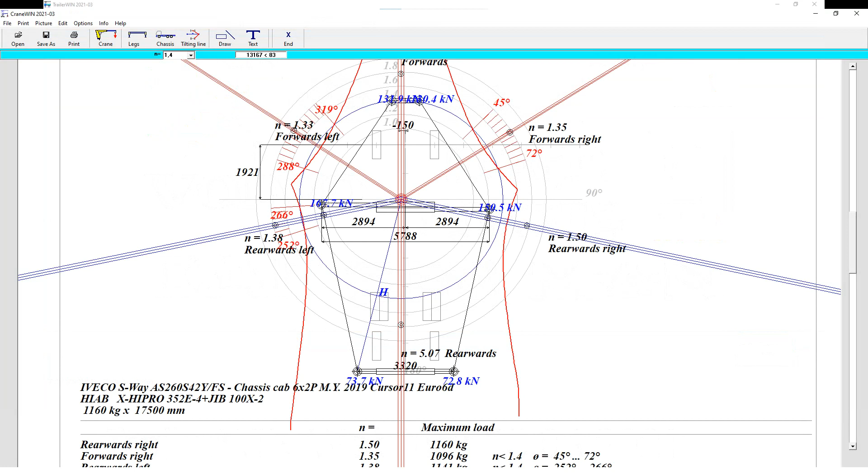TrailerWIN program is not only designed for trailer and truck calculation, it also has a lot of programs that are connected. For example, CraneWIN for crane stability calculation. We have FrameWIN for subframe calculation, and CornerWIN for advanced turning simulations, where we can see both static and a lot of different simulation options. For example, 180 degrees, 12.5 meter turning.

So I will start with selecting what type I want to calculate. I will put this highlighter on so you can better see what I'm doing. So we can calculate trucks and different types of trailer, and we can also make combinations of all these.

We start to select the truck, and there you can see a long list of models, and they are grouped in different years depending on when they have been put on the market. And as you can see, we have here a very long list, so it's almost all that is produced in the market.

I will start with, for example, now a new MAN, and we select here different models that are in production in 2021, and you can see that the MAN models are also for other truck markets. We have also for Euro 2 and for China 6 and those models.

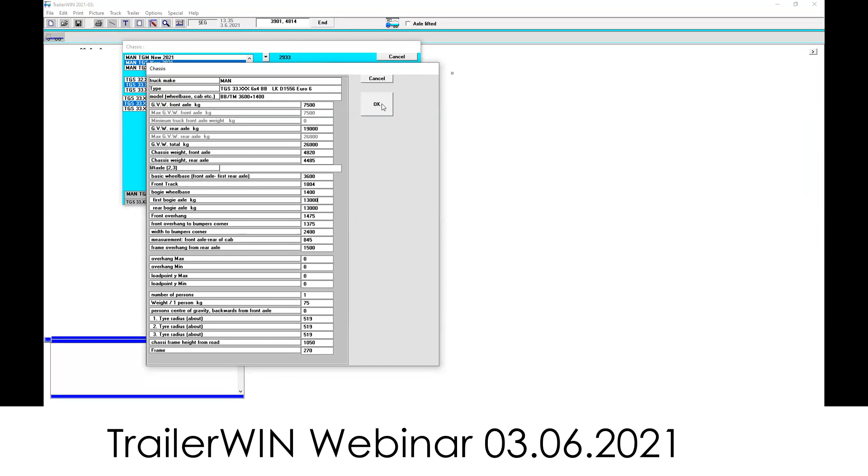Everything of this can be modified. So if you have some special model, you can also edit the measures and build up a model that meets your requirement.

Now when we have selected the model and the wheelbase, then we have the drawing of the chassis. We have a detailed cab drawing. We have a measure for front overhang. We have also weights unloaded. We have also max allowed weight for this model. So everything comes from the database.

Now we can start to add some body on this, and I start to click on the body button, and we find here fifth wheel. We have different types of body, box body, open body, side door, and so on. We have also a list of standard bodies that are made from drawings, and they can have all information like weight and center of gravity and also the load point.

But we select here standard box body, next window, we get the data for that one. And we have a body length that the program has already calculated for us. TrailerWIN calculates the body length to get maximum load on rear axle, so we can use as much load as possible when it's evenly loaded.

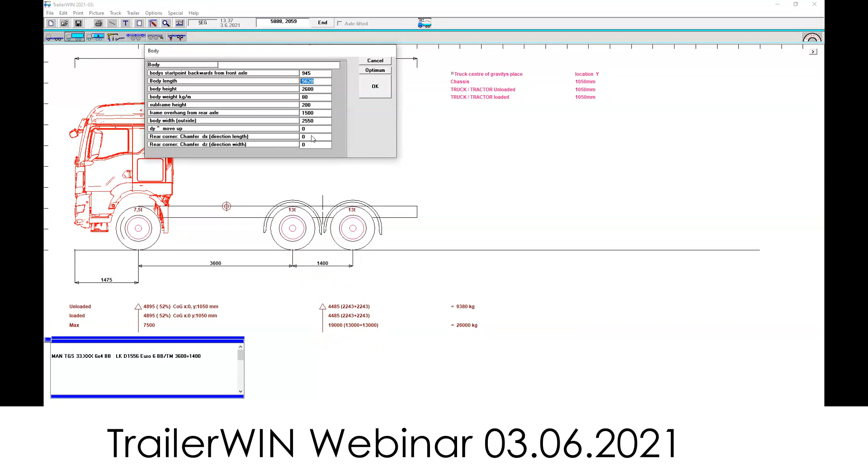We go to next window, and then we get a question about drawbar. We want to have a trailer behind, and we have different standard positions of the drawbar, but we can also here give a value where we want it to be. We have also the possibility to put underrun protection and also position how deep it will be.

So now when we have finished, we have a truck, we have a body on it, and we have already calculated what will be the maximum load that we can take on this chassis. We can see here the empty weight with the body on, and we can also see what the loaded situation will look like, how much we have on the front wheel and how much we have on the rear bogie, and what is the maximum allowed.

We can continue to add more equipment to the truck. We can add, for example, a cooling unit. So we go to the Devices menu, and here we have a lot of different equipment, and we select the cooling unit. We have many different manufacturers here. We have also a lot of different models.

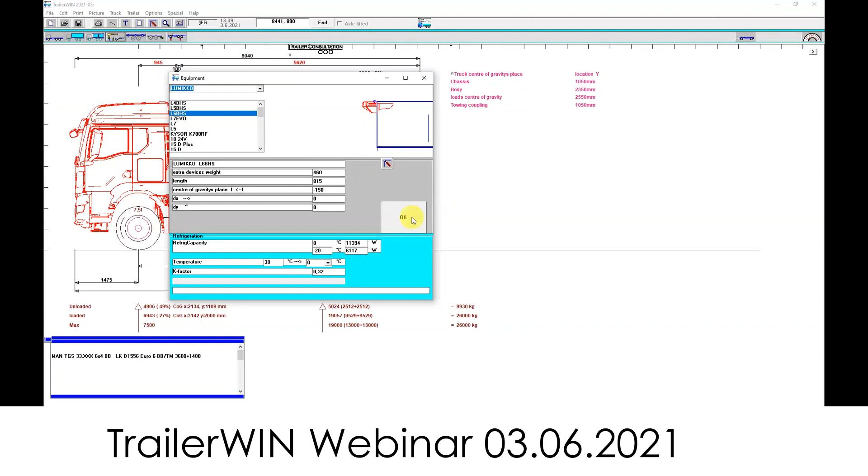So now we have a cooling unit. We can see directly from the picture that this will not work. It will go into the cabin. So you can visually also directly see what is going to work and what is not. We can easily modify. We can drag the whole body rearwards by clicking on the mouse and dragging it rearwards. We can edit the height of the body by grabbing this handle and lifting.

We can also change the length of the body by double clicking on the red hotspot measure, and then give a new value, and then we have entered a new body length for it. And every time we do something, the program is calculating the weights automatically. So we can see here now directly that we have too much load on the rear.

So this makes it more safe to do changes and to try out things, because you can all the time see what is happening. You get a warning if the chassis will get too high, or if you have other problems with the truck that you need to focus on.

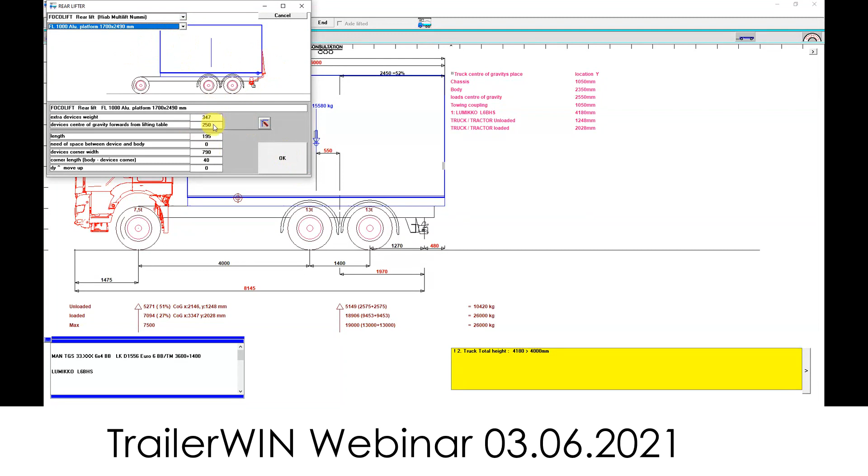We can put a tailgate lifter here also. Choose this type of body. I select the model. And as you can see, when I select the model, we have a detailed drawing. We have also all data for it. We have weight, center of gravity, length, and everything. So this is all in the program.

We can see also all the loads, or all the weights that we have on the chassis in this weight table. Here we can see first the chassis weight, front and rear. We have driver. We have body, how much the total weight.

We have the cooling unit. We have the rear tailgate lifter. We have towing coupling, and here it is very easy to see what is making the load on front and rear axle.

We can also now, when we have this, add a trailer. We have a trailer coupling already. Then we go to the trailer menu. And here we can see different types of drawbar trailer from 2 to 6 axles. And we have also different options with steering. For example, here we have last steered. We have second front steered, and so on.

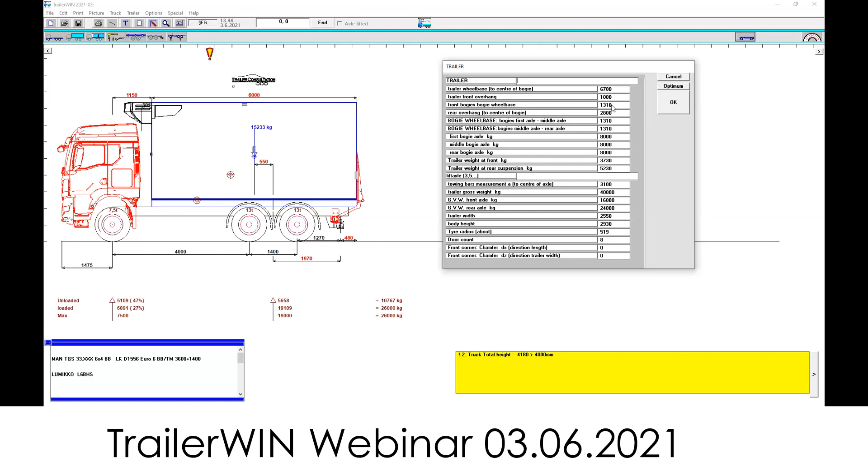We have here measures for the trailer. This we can modify according to our specifications and what we want to have. TrailerWIN has now made a standard trailer for this combination. We can see here also the weights and also the max allowed weight for the axle groups. For the trailer, we have also the possibility to add all kinds of equipment.

We have also a special devices menu where we have a lot of different useful equipment that is used on trucks and trailers. Here we have, for example, toolboxes. You can easily, with the mouse, just click and drag it to the position where we want to have it. And everything that we put on here has a predefined weight.

We have also, when we go to the load window, by default one single load that we put on a truck or a trailer, but we can also specify a special load if we want to have, for example, 26 ton, and calculate how it will look if we have the center of gravity in a certain position of the trailer. And then we can do a weight calculation for that exact transport.

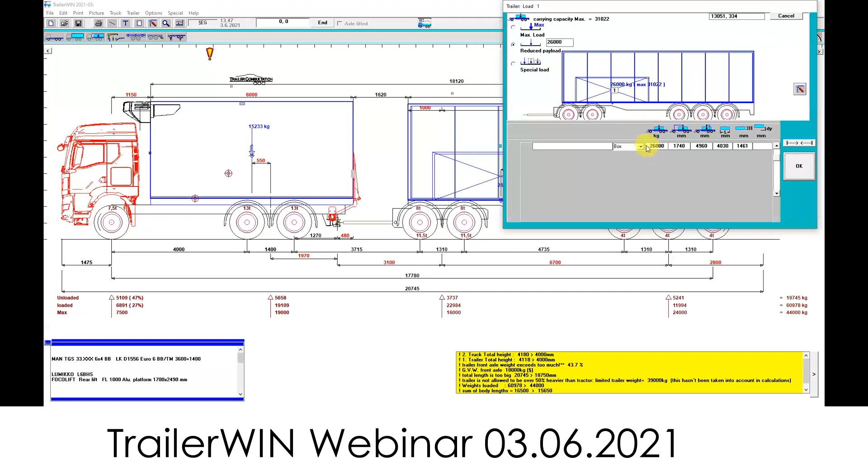Another option that we have is to use pictures instead of boxes and arrows. And here we have a lot of different types of loads that can be used. For example, we have some diggers, we have boats, we have cars. So then you can put on a load with a picture, and then you can give the position where it will be placed, and also the center of gravity and the weight. And that way build up a special transport situation.

This is useful also for companies that are doing heavy transport, so they can see where to put the load in the transport to get the best load share.

Now we can look also at turning. In TrailerWIN we have the possibility to see a static turning picture, and this is showing the minimum radius the combination will go into if you are driving many revolutions in a circle. And in this case it's 12.5 meters, but we can also calculate with other radii if we want.

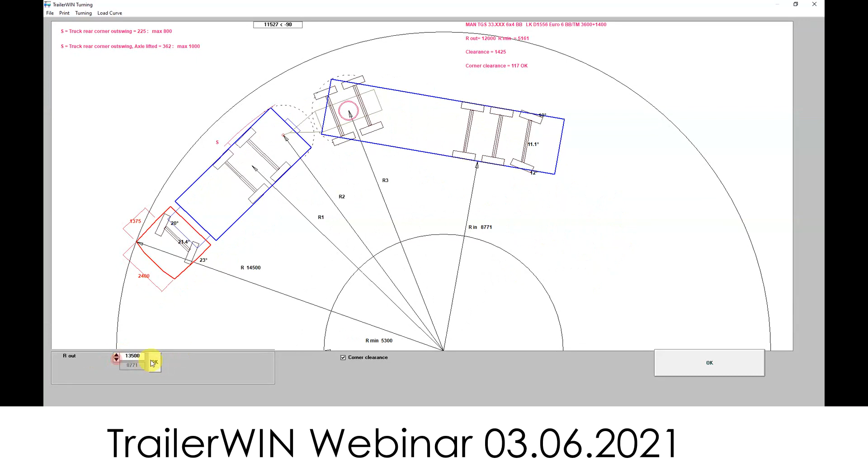And this is a turning picture that is many times used for registration of the vehicles, because if we have enough radius for the trailer in this static situation, it will never be a problem in real life, because all the traffic roundabouts and crossings are designed to cope with this type of vehicle.

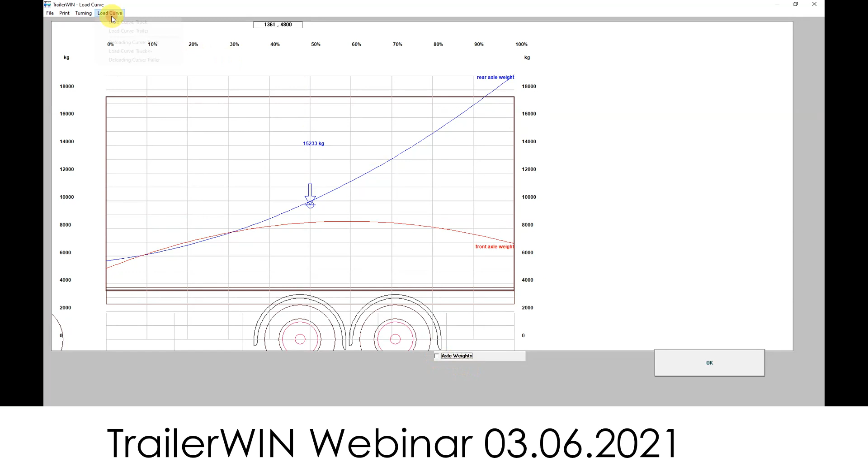We can activate axle weights, and then we can look in this load curve window. Now when I activate the axle weight, we can see when we are loading to the max due to this curve, that the front axle weight will reach the max limit up to this point. And after this point, it will be the rear axle weight that will be the limiting factor here in the load capacity.

So with quite few mouse clicks and quickly done, we have got a lot of information about this truck and this trailer. And this is helping a lot when we are sitting with the customer and he has some ideas what he wants to build. Then we can see how it will work, and we can avoid problems at an early stage before we are making any mechanical work on the chassis.

Now when we have checked the static turning picture, we can also look in CornerWIN what more we can do there. And I jump over to CornerWIN, and then we see the same static turning picture that we had in TrailerWIN. We can also see all the dimensions, but here we see dimensions to turning points. So we can see when we have a steer axle at the rear, the steering point for the trailer will be between first and second axle.

All the technical data come directly from TrailerWIN, so we don't need to input anything again. Everything comes automatically. But here they can also be edited if we want to make some checks to see how it will affect the turning.

We can open up the window with different corner modes. Here we can see many different standards. Austroads road swept path, we have 90 degrees, 120 degrees, 180 degrees turning, and so on. We have also here the Finnish regulation and the regulation for special transport, where we are turning in 16.5 meters. So they are all predefined here.

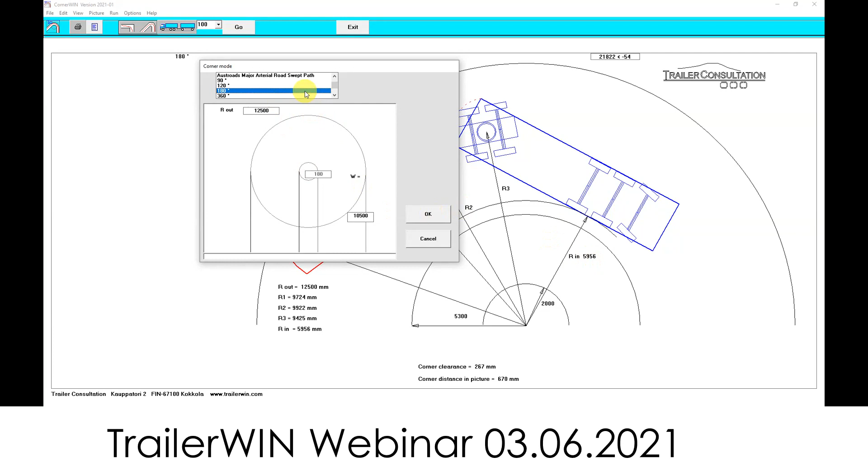We can look what it will be if we look at 180 turning, making a U-turn. And we check the value we have for the inner radius in the static picture. That means that we are driving many turns in the same roundabout. And compare it with what we will get if we are simulating a 180 degree U-turn.

So in the beginning, the truck and the trailer will be set in the start position. We press the go button, and the program will start to simulate turning in 180 degrees. And with each calculation, it checks what will be the position for the combination truck and trailer, also taking into account the turning axle.

So here we can see that the minimum radius that the trailer will go is 6,167. So it will not go into this static minimum in real traffic, 5,956. We can also compare if we drive a whole revolution

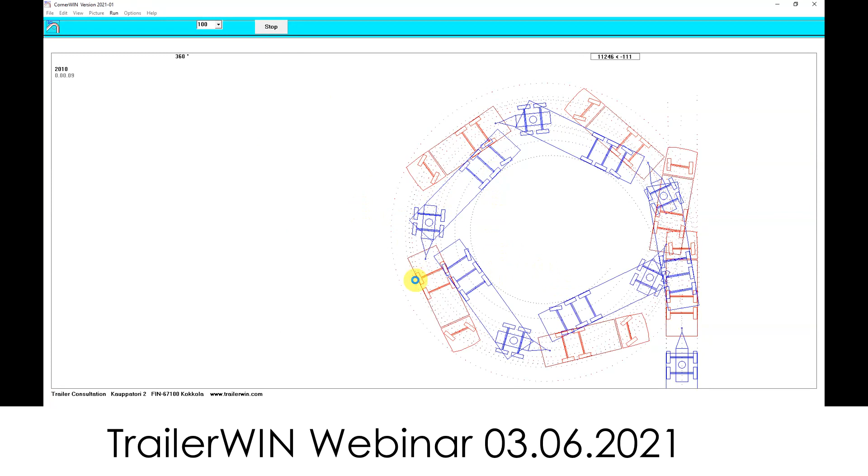and see what happens. Now we are driving 360 degrees. The program is calculating the movement of the parts all the time. And now when we come in the closest position, 5962, so even if we drive a whole revolution, we will not come as close as we have in the static picture. So this gives a more precise picture of how it will act in real life when you're driving, and where you can pass with this combination.

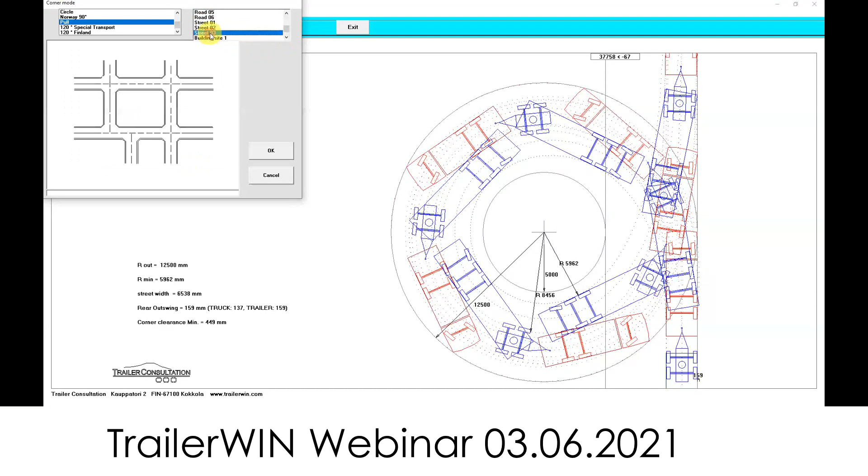In CornerWIN there is also another interesting feature. We have different traffic situations that we can use. We have some intersections of streets where we can define all the lanes separately. We have traffic circles, different types. We have also a road with some curves. We have also some streets with different types of crossings. And then we have also some examples of some building sites that we can use. Or then we can choose a DXF file and take that as simulation.

And here we have, for example, one area that is made for a simulation. I will choose here a more clear picture so we can all see what we are doing. And this is now a situation of a loading area. And this was in Germany, where they have a loading space in the backside of a market, and they had made plans for a narrow street.

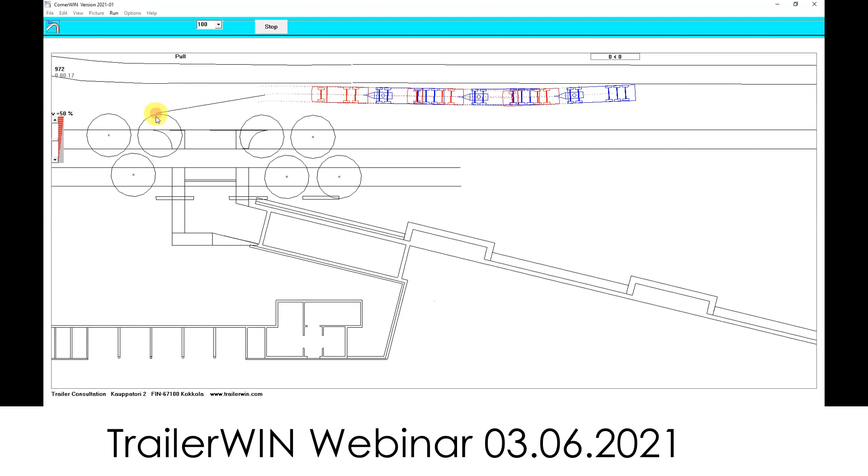We can test with this combination. We do mouse clicks and point with the direction where we want to have it. So it's like playing with a small car and pulling it. And the program is all the time calculating where the trailer will follow. We can here see that it will be quite narrow. Let's see if we can make it. Here will be quite a sharp turn. And we will use the maximum of these curves.

But now we can already see that the trailer will cross over the gate where we come in. So it's not possible to come into this area. Now we can stop it, and then we can do a playback. Then we can see actually how it is driving in this.

So with this TrailerWIN software, you can also do advanced simulations and also help companies building their parking sites and loading areas to let long vehicles pass into these, to avoid problems, and easily show them how much space a truck and trailer will need for this.

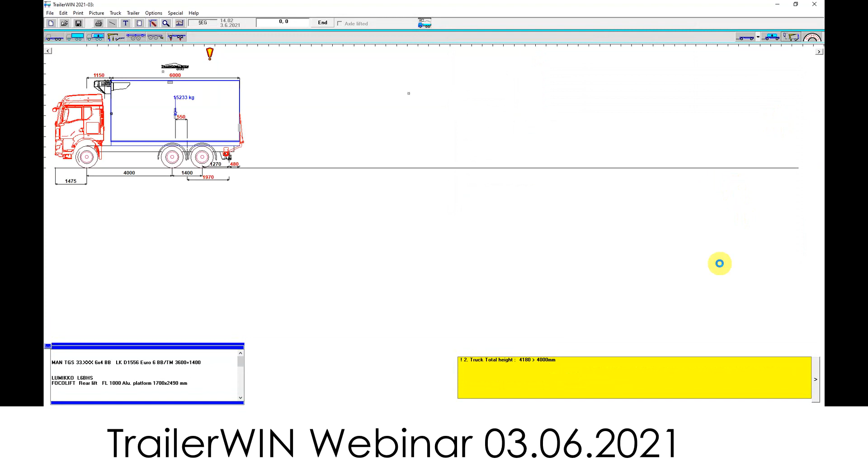Now we have looked at a combination with one trailer, but in TrailerWIN you can also add a second trailer. And here we will now open a second trailer to this. And here we have then measures for the second trailer. And when we have this kind of combination, here we have a 35-meter combination with 2 trailers, then there's no need to look at any static turning picture anymore because it will never work. Then you need to check the turning in some simulation program.

And for example, for this kind of combination, in Finland we are using 120-degree turning and the same 12.5 meter outer circle. The program is making the turn, calculating where the first and the second trailer will be, and then it shows at the end what will be the inner circle, the minimum radius. 4,600 millimeters will be the second trailer minimum radius.

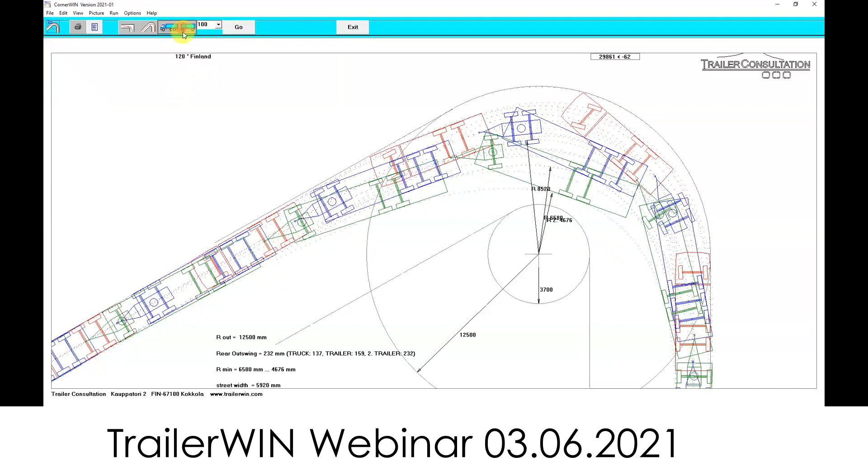In CornerWIN, we also have the possibility to find some standard combinations, and these are meant more for architects and those that are planning streets. But here we can also find 3-trailer combinations. We have B triple. We have AB triple combinations with a full drawbar trailer and a fifth wheel, and then a semi-trailer at the end. And we have also C-train combination, where we have 2 semi-trailers and then a center axle trailer at the rear.

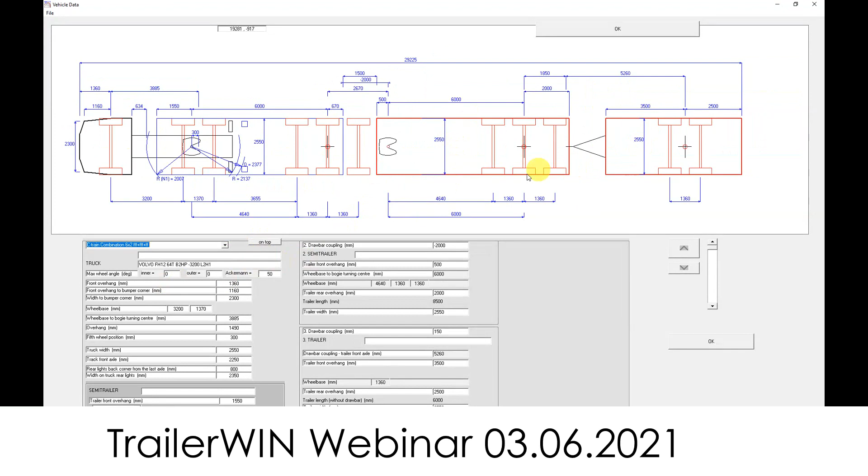And these combinations can be used to build up simulation models to see how it will work with different wheelbases and lengths of the trailer. And here we can see the radius for all 3 trailers, what will be the minimum.

What more do we have in TrailerWIN? We have, of course, the possibility to print different types of documents. We can print out a picture. It will be like a drawing of what we see on the screen. We can also print a data sheet, and the data sheet will show you all the technical data. I can preview them in the memo window also.

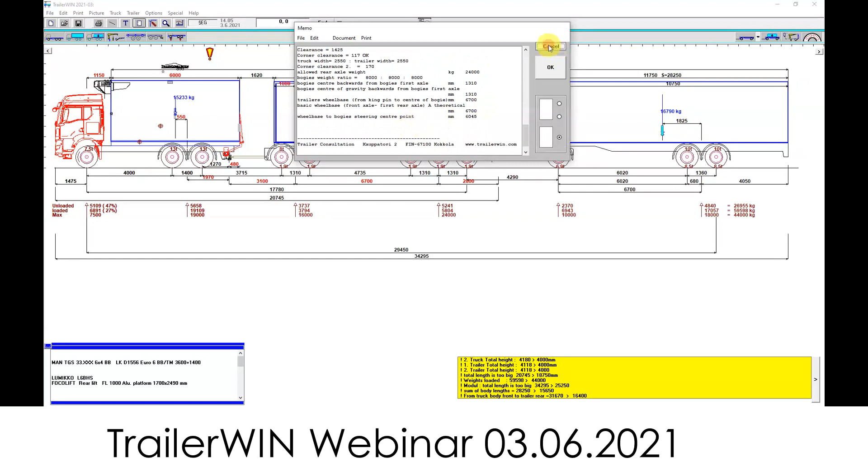So here we have all the data for the chassis. Then we have also data for the trailer, weight calculation, and all the warnings and so on. We also have the possibility to do weights and center of gravity calculations for the truck. We can print out a data sheet with a small drawing and technical data underneath, turning window, and so on.

We can also export the drawing that we have on the calculation into a DXF file to continue working on it in CAD programs. So this is very useful when you want to add more details and make some more advanced drawings for the team that is producing it. You can also take the picture on the clipboard and put it on offers for the customers or technical data that you want to present in a separate documentation.

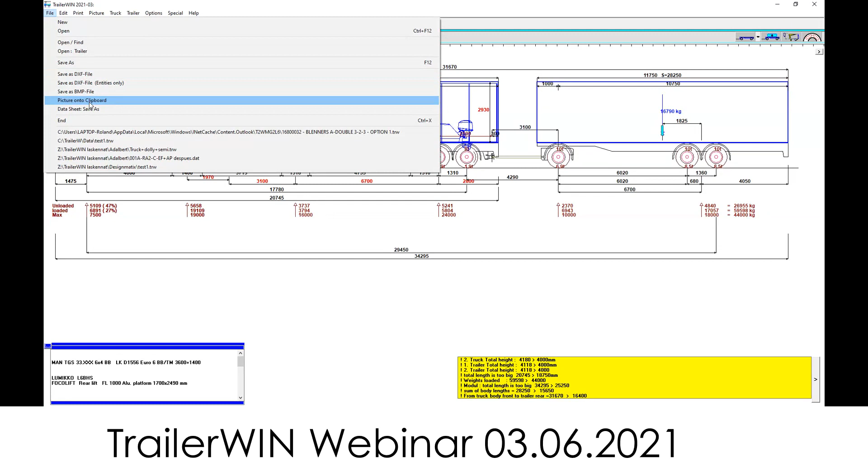You can select if you want to have measures and weights on the picture. Here we have removed all the measures. We are leaving only weights, or we can also remove weights and have a clean picture.

Sir, is it all for the TrailerWIN software? This is exactly what we can do? This is now the biggest and the most important feature. In the program there are, of course, many other features as well. Is there something special that you want me to go through? I can do that also. Sir, I have some set of questions. Can I share them with you?

Yes. So, being a manufacturer, I get an inquiry that I have to bolt a tipper on any specific chassis. Suppose the customer says on Ashok Leyland 3520. Then the biggest problem which comes to me is what are the overall dimensions of that vehicle? Means what is the wheelbase, what is the width, what is the length, what are the heights, and what is the physical structure. Now for this I have to do two things.

The first thing is whether I should go to the chassis and measure the dimensions to create my drawings, or I should use some of my past experience. Then how does this software help us get the relevant information about the chassis, if any chassis comes to us, and how can it help us decide things, sir?

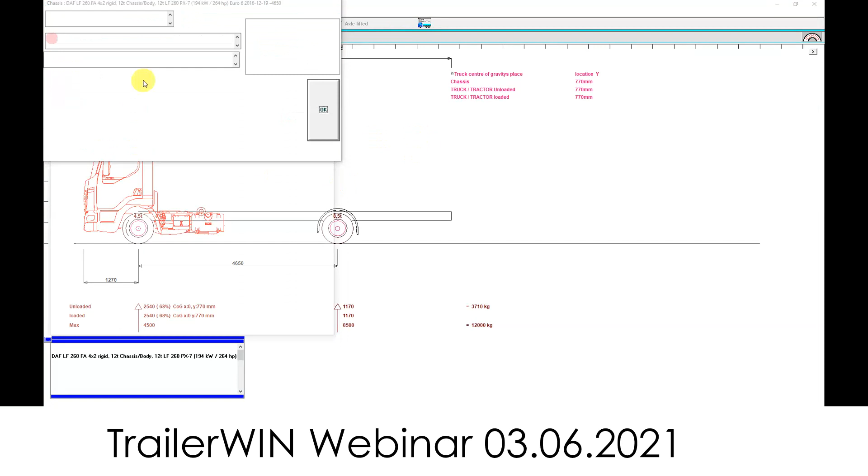Yep. Okay, so we will build a chassis with a hook lift. I will choose another chassis this time. We can take a smaller one. Four by two. Okay. So here we have selected the chassis, and as you can see, we automatically get the chassis weight, front and rear, wheelbase, everything. This is in the database.

Okay, it means that we have a predefined database where all the details of chassis are preloaded. So if we have to select any chassis, we can select it with the help of this window from here. Exactly. We add new chassis all the time, and if some chassis is missing, we can do it very quickly and also send it in a package that can be installed easily in the program.

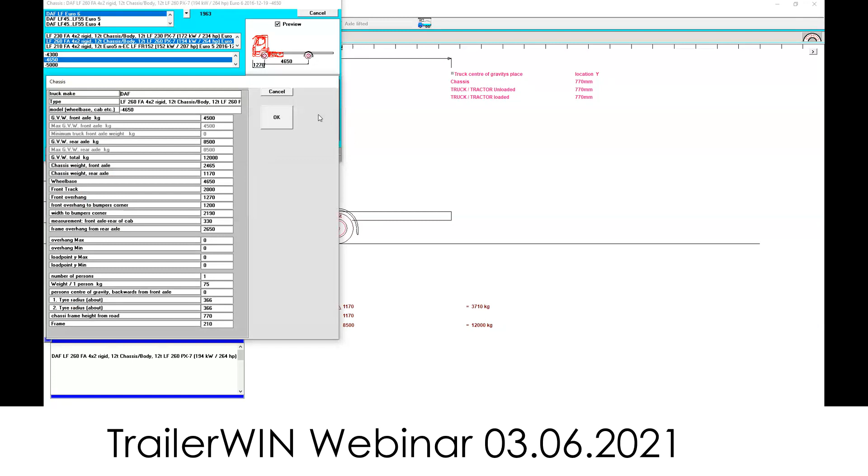Can we also install that chassis in this software, sir? You only send the drawing and the technical data to us, and then we can add it and send it back very quickly, and then you can add it to the program. Okay, okay, I see. Yeah, please, sir.

We are working on the chassis drawings for Indian BS6 compatibility for all the manufacturers. So very soon we will have all the data for Tata, Ashok Leyland, and all other chassis manufacturers. So the BS6 updated versions will be available.

Okay, sir. Right. My second question is, once we get the chassis dimensions, we know that we have to build one tipper or one container or whatever the application is. Then the biggest problem is to define its height and its width. Generally, we take a thumb rule that whatever the width of the cabin, it must be the width of the body. So is there any kind of tool here that helps us select the width, height, and all those things?

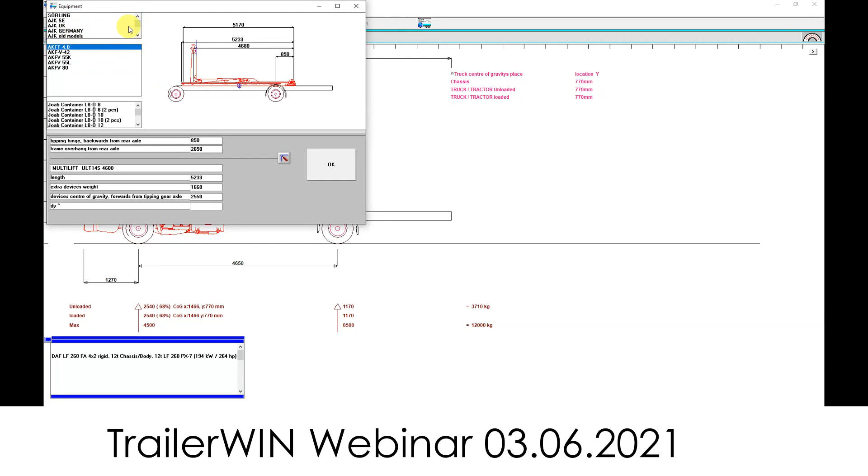Yeah. We can start building up a hook lift on this one, and I will show you a little bit of what TrailerWIN can do with hook lifts. We have here many different brands, different sizes for all types of vehicles, also light trucks and heavy trucks. We have skip loaders, hook lifts, and I will try to find something that could be suitable for this chassis.

I think this is a little bit heavy for this one, but it will fit here in the chassis. So can we do one thing? Can we see that hook lift and chassis mounted application here on the screen, how it is working, so that we can relate the question with what exactly it can do, sir?

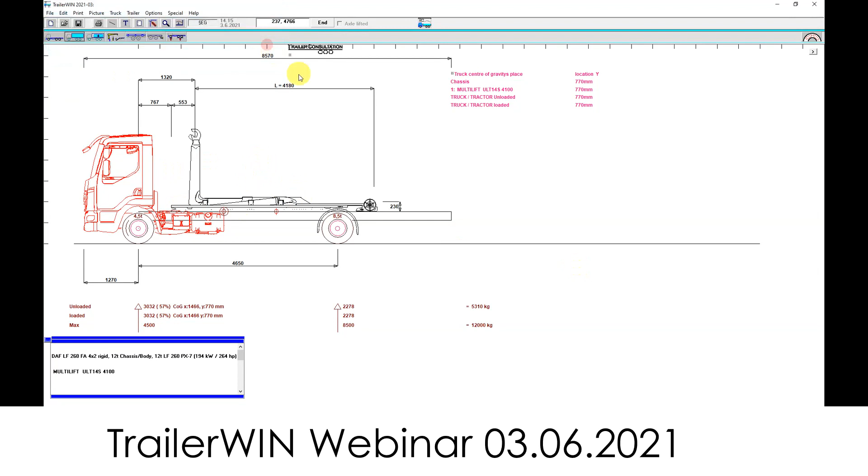Yes, we have now the hook lift here on the chassis, and now we can add also a body on this hook lift, and the body will be placed on top of the hook lift. We don't need any trailer coupling in this case. And now when we have a hook lift and a body on that, we can see what load we can take, because the placement of the body will then be decided by the hook lift, where the hook will be.

And now we have also one other thing that we can see. We can see the front axle in the lifting body situation. When we are pulling the hook body on the hook lift, and all the weight is on the rear end of the roll, or the midpoint of the roll, then we have the maximum weight on the rear axle and the minimum weight on the front axle. So we can see that we have about 10,200 kilogram rear axle weight in this situation when we're pulling on a fully loaded body on this hook lift.

We can also have a high type of body on the hook lift, and then we can do measures directly on the TrailerWIN picture. For example, if you want to check how high this will be, we can put the cursor on the ground level, press the left button, and we can see in the coordinate window up here how much we have moved in horizontal and vertical direction. So we can see that this is at 2,850 millimeters from the ground. So this can be very useful for calculating heights for different types of bodies that we put on a hook lift.

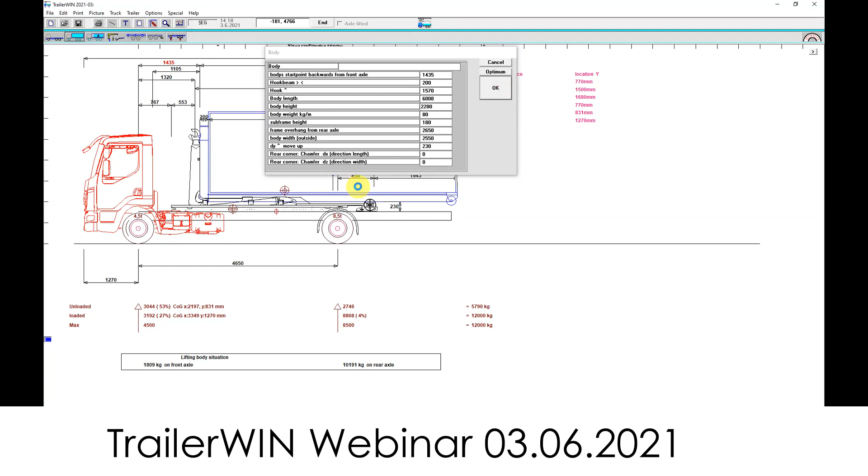Then we put a body on, and we can of course here also modify dimensions of the body. We can also change the height of the body. And we don't want to have any trailer coupling in this case. Then when we have the body on the hook lift, it knows what will be the height from the chassis frame where the body will stay on the hook lift, and we can calculate the height of this body when it's hooked onto the hook lift.

And when we look at this coordinate window, put the cursor on the ground level, press the left mouse button, and then when we are moving up to the top of the body, we can see that the height is now 3.3 meters from the ground. So this way we can easily and quickly make a measure to see how high it will be.

And as I explained also, in the body lifting situation, when all the body weight is on the roll here and we are lifting it on, we will have less weight on the front axle because it will be acting on this loading roll here. And on the rear axle, we have 10,191 kilogram in this situation. We can also see the load capacity we can take on the hook lift body.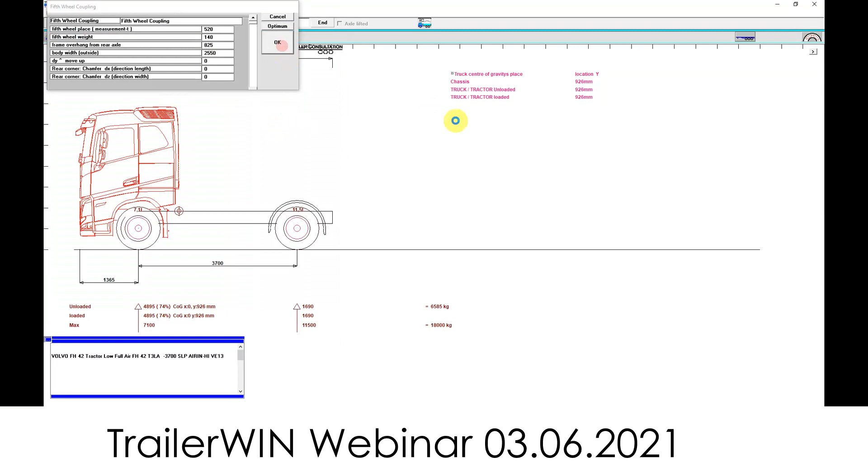Yeah, 4x2 would be perfect. Yeah, single axle. Yes, and then we put here a fifth wheel. And when we have selected a fifth wheel in TrailerWIN, we get the semi-trailer option. And here we can have semi-trailers with 1 to 4 axles with different options of steering axles.

We can select here a 3-axle with fixed axle, and we select what type of body. So here we have now the semi-trailer combination. If we want to make a lift axle on the trailer, we can do this in the trailer data menu, where we can define, for example, that the first axle on the trailer will be a lift axle. Then we put the 1 here.

And when we do that, we will get activated this axle lifted checkbox at the top. So we can lift up the axle. The program is recalculating the weight share between truck and trailer. And the load center will be between second and third axle on the semi-trailer.

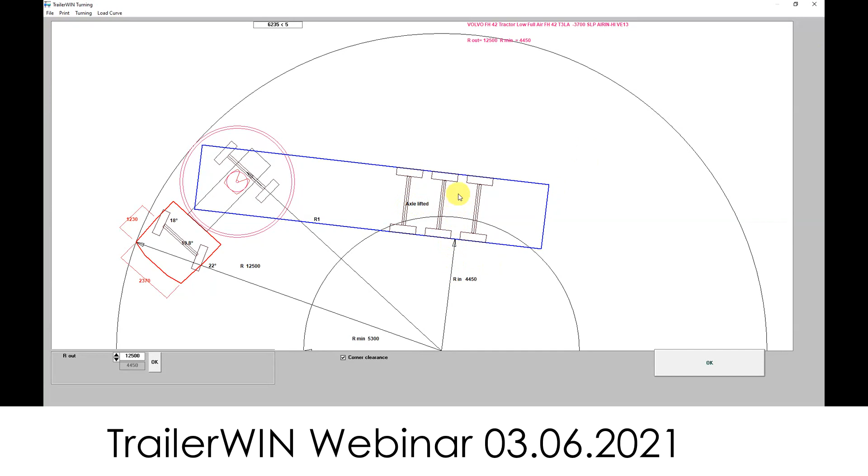Now we can do the static turning picture, and we can see that this arrow is always pointing to the turning point of the trailer, and we can see that this axle is lifted, so the turning point will come between second and third axle. This same situation will also appear in CornerWIN. When we jump to CornerWIN, we have the same static picture.

We can do simulation with the axles lifted. So when I do this simulation, the program is calculated with this axle not on the ground. So the turning point will be in the center of the rear 2 axles, that we can also see here in this window. This cross mark is showing the turning point.

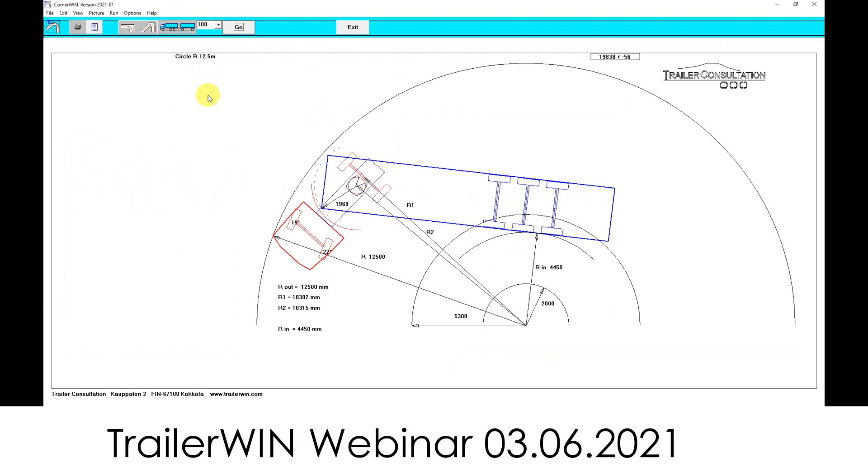Awesome, great. Mr. Roland, second question was related to the CornerWIN. The maximum radius and the minimum radius, can we edit it, or is it system built? We can edit it, because if we want, for example, to make calculations for 180 degrees, you can see that in these fields we can write whatever we want. We can have an outer radius of 14.5 meters. We can have street width, we can change to 12.5.

And when we do the simulation, the program is calculating turning in that kind of circle: 14.5 meter outer radius, inner radius will be 2 meters, and we have 12.5 meter street width. Okay. Because in India we have maximum outer radius as 13.7, I hope. Right, Prabhakar sir? It's 13.7 it seems.

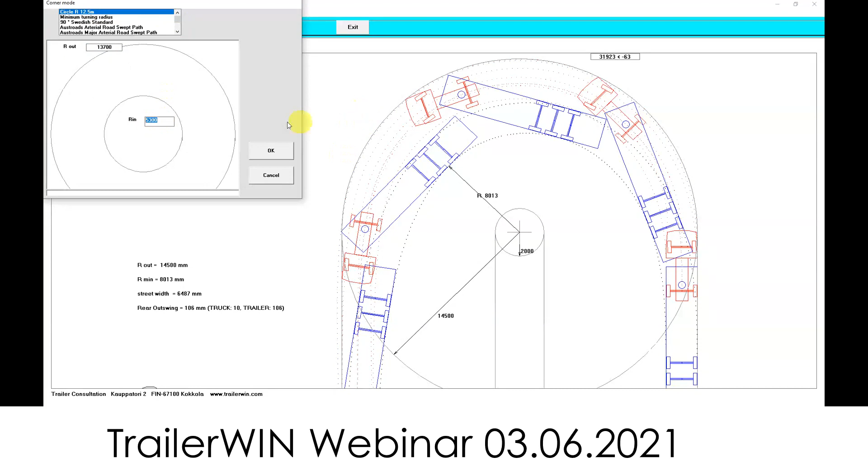Yeah. And that we can do also for the static picture. We want to have 13.7, and the inner radius, is that 5.3, or do we have some other? We have 5.2, it seems. Yeah, 5.2. So then we can see a static picture with those characteristics, 13.7 and 5.2. Great. So this is useful for many different markets and also for many types of transports, because special transports usually also have special regulations depending on how long they are.

Okay. And the maximum and minimum steering angles of the tractor, is it standard? Can it be changed as required, because normally we don't get this input from the truck manufacturers. Yeah. The maximum steering angles can be given by putting values here in the maximum for inner wheel and maximum for outer wheel. But the only situation where this really comes into a problem is when we are doing calculation for minimum turning radius for the truck.

This is the only way that you can use the maximum steering on a truck, not when you are driving in any simulation, because all the manufacturers build trucks that can fulfill the 12.5 meter minimum radius. So when we are calculating the minimum turning, then we have the possibility to change here, and we can see how it will affect the turning radius. We give angles separately for inner wheel and outer wheel, and the program then calculates the minimum turning radius. Okay.

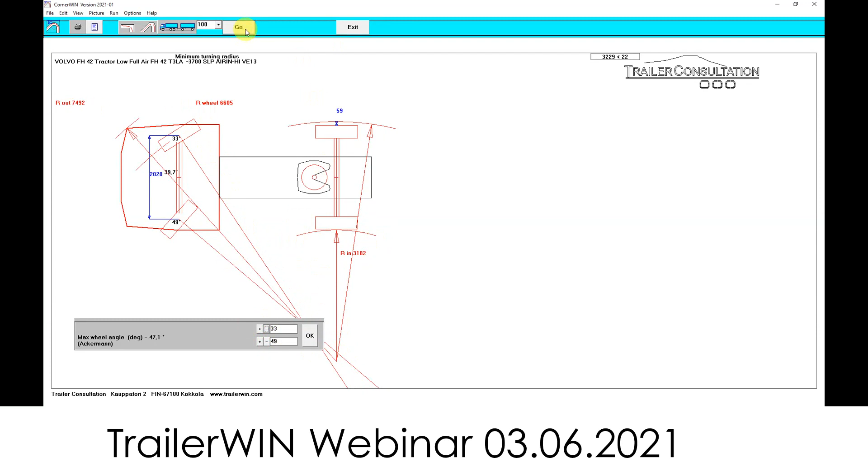Great. Thanks, Mr. Roland. I think Mr. Venkateshwar Rao from Volvo Trucks wants to ask. Yeah, good afternoon, Mr. Roland.

Regarding the semi-trailer, aerodynamic shape design for trailers is actually important today. So providing a wind deflector on the truck cabin, how will it change the behavior of trailer design? That means wind effect on the trailer. Will this software be able to address that, or any change in wind deflector angle? What design change is to be made in trailers? Does this software address that? This we want to know.

We can add wind deflectors here on the drawings also, but the program does not calculate the wind forces and such things. Okay. But when we are looking in the cab view, for some manufacturers we have standard spoilers that are in the drawing, but not for all. It depends on how the drawing comes to us.

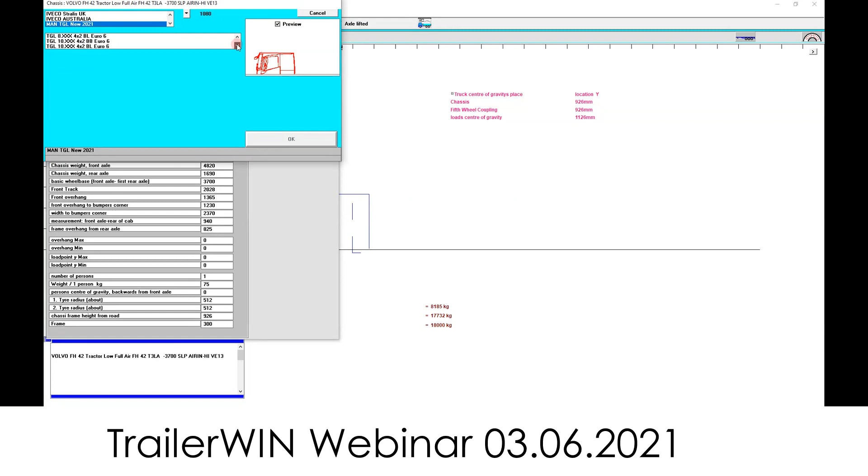Yeah, so now you can see that we have a standard spoiler from MAN, and we can add it on the picture if we want to have a spoiler on it. Okay. And that is of course.

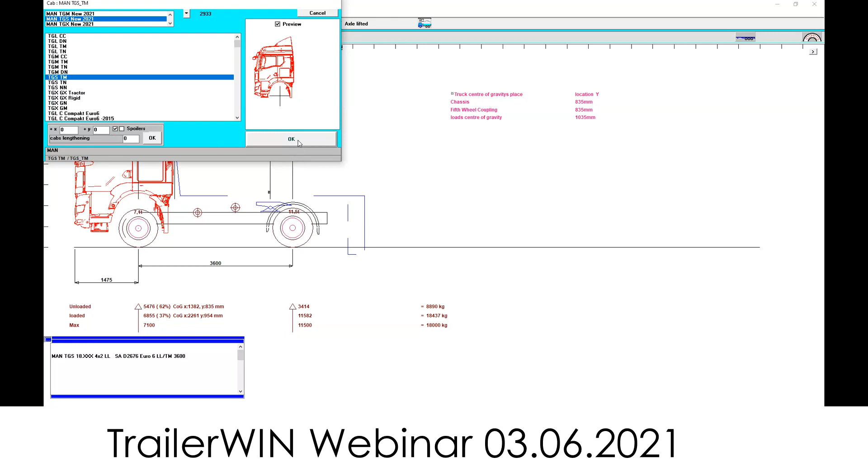Sorry, yeah. So by adding that, how does the wind force get changed? Is it on a trailer? Is it possible to change the design of the trailer with the help of the software which you are proposing? Be it a wind deflector. Also, at the point between prime mover and trailer, there is a gap. So providing spoilers there, and also sideways on both sides, the wind force will come down on trailers. It will also support better aerodynamics. So will the software support that, showing how the wind force is going to reduce on trailers?

No, as I said, the program does not calculate any wind forces, so that is not in the program. We can add them to show how it will be, and we can also get the exact positions where they will be. So, for example, if we have a cooling unit on a truck, we can see if the wind deflector will cut into this. But wind forces can't be calculated in TrailerWIN, so that is not in the program.

We have a software for that called DrivelineWIN. Yeah, and there you can do some calculations for wind forces. But that program is made for defining what type of gearbox and rear axle ratio we need to have, what type of tire to get the best climbing force, and also you can calculate what the wind force can be when you are driving. Do we have more questions about this semi-trailer, or do we continue?

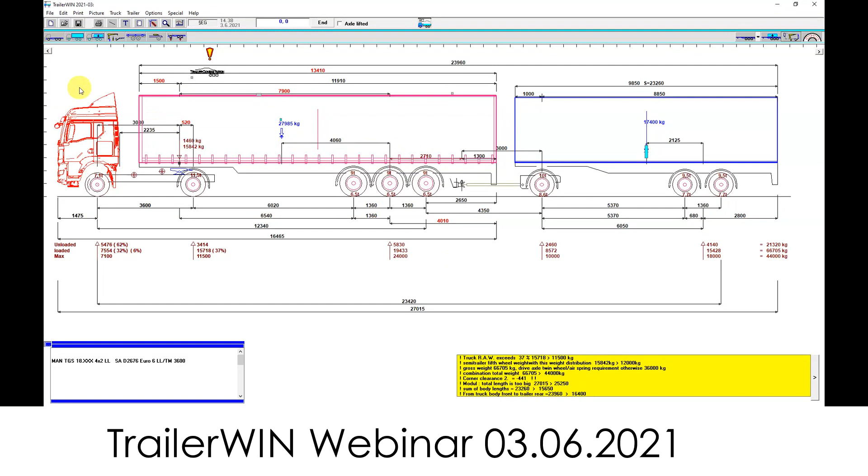I can show you one more calculation, and we will do a truck with a crane, and then we will look a little bit in TrailerWIN how it looks. I just select here a random model. Then we go to the equipment menu and select a crane, and here you can see different brands, and these data behind the cranes are very complete. We have all the data on the lifting situation, we have outreach position and such things. So these data have come directly from the crane manufacturers to us.

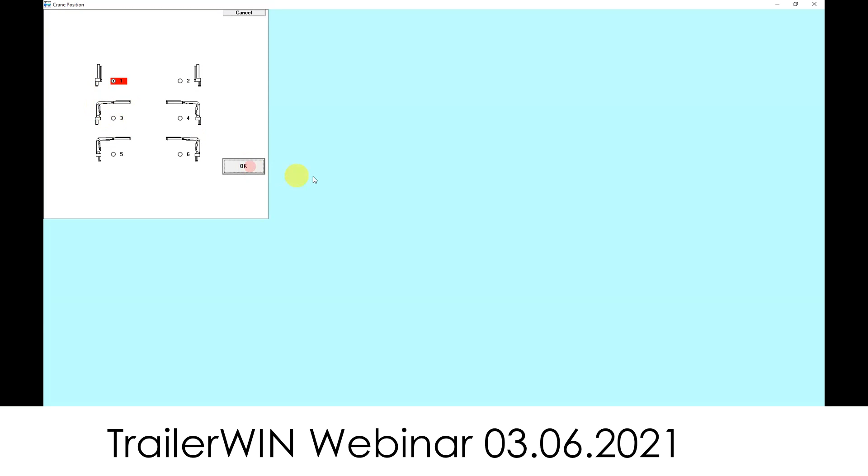I select here the crane, and then we can select what position we want to have it on when we are driving on the street, the transport position. Usually it's a folded position, but for forest cranes and such things, we usually have them in open position on the truck. We have different types of support legs, and these come from the crane manufacturers. We have the weight difference for these. So if you select the bigger stabilizer, we automatically get some more weight on it.

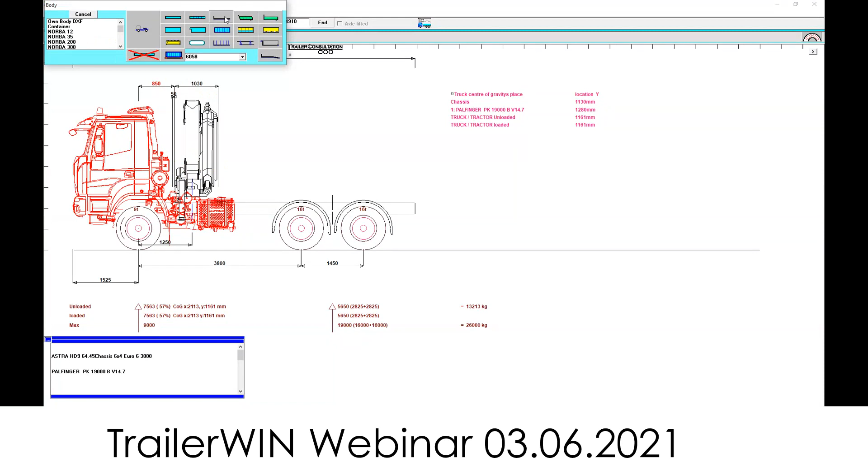The program knows what is the first spot that it should put it, depending on the rear end of the cabin of the truck. So now we have added the crane. Then we can add an open body on it, that we usually also have. We select drawbar also, and the program knows that we have a crane and how much space it will take, so it will automatically put the body behind the crane. So with a few mouse clicks, we have already built up a chassis with a crane, and we have a body on it that has also been optimized for the wheelbase that we have selected.

So now we can go into CraneWIN software. In CraneWIN software, we can see the stability for this. I will zoom out a little bit. So we have here the front axle, and the center of the diagram is on the crane turning point, where the boom is turning. We can see the stabilizer legs, and we can see also the stability chart. We have set a minimum of 1.4 as safety factor. And the program is showing what is the stability to all directions around this chassis.

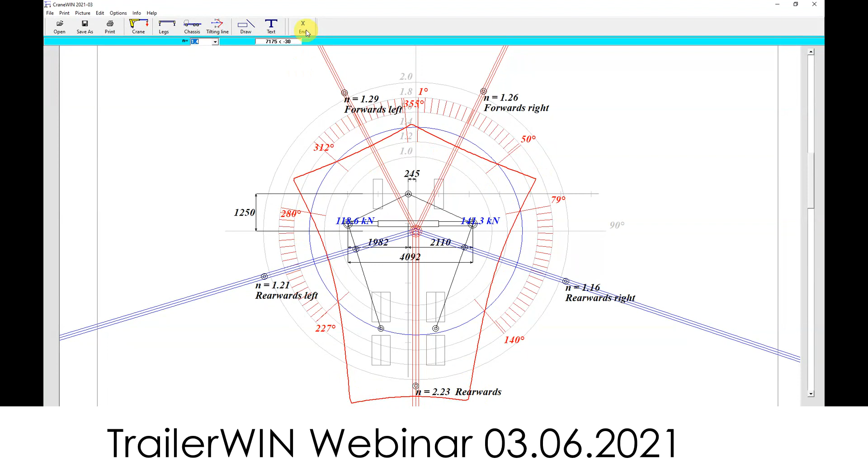We can go back, and then we can select a wider stabilizer, choose the widest. We get a new weight calculation with these heavier stabilizers automatically. We jump over to CraneWIN, and then we can see how it will affect stability. So we can see here that bigger stabilizers fix almost all of our problems. We still have problems to the front. So we can here add a front stabilizer.

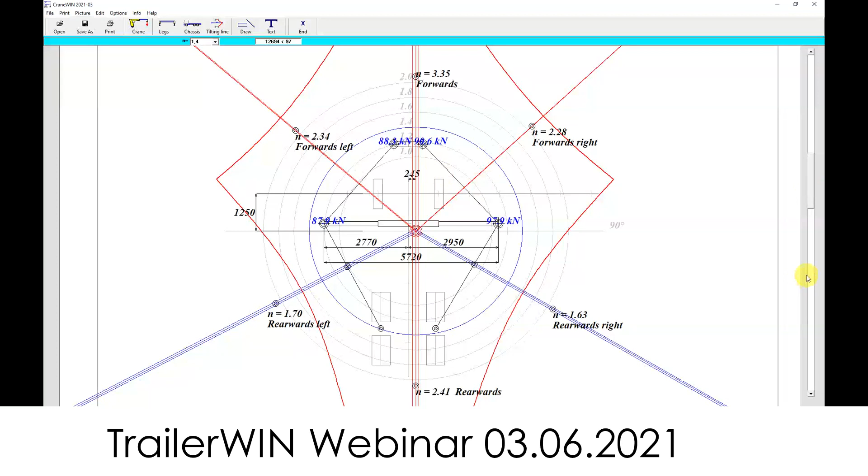We go back to TrailerWIN, the devices menu. We jump into stabilizer and select front from the list. We add them to the chassis. We add it to the weight calculation automatically. And when we jump into CraneWIN, we can see the stability with the extra front stabilizer. So this makes it very easy to find out what type of crane, and if an extra stabilizer is needed for the customer, to make it safe.

So the link between TrailerWIN and CraneWIN is built so you don't need to put any data twice. You can get everything automatically from one program to the other. Do you have any questions about this CraneWIN, cranes on chassis? Sir, I have one question for you.

Suppose, sir, we need to increase the wheelbase or the rear overhang. We have just encountered one case where we have increased the rear overhang to 90% of the wheelbase, and we need to check the stability criteria of that truck mounted crane along with the body with the help of this software. Is it possible to do alterations to check out the behavior of that vehicle?

I'm not sure if I really understood what you meant, but we have here, for example, now when we have this body on, a rear overhang of 2200. That is 49% of the wheelbase. We can increase it, and we can see automatically how big the overhang is compared to the wheelbase. We can see about 55% now, and we increase it, now we have 57% of the wheelbase.

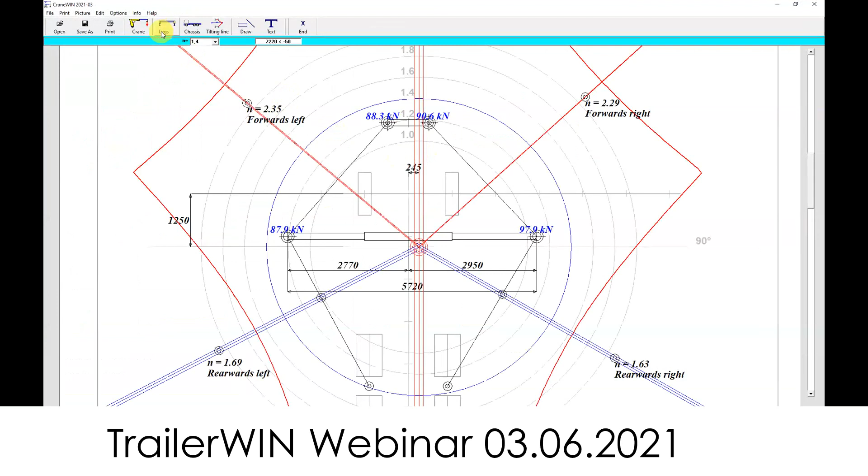Yeah, the rear overhang doesn't affect the stability more than what the load and the weight of the body will do. Because in this stability calculation, we are calculating with an empty vehicle, no weight. So we don't calculate with any load on it.

Okay, but here the stability point will come in the middle of the rear axle bogie at the outer point. We have this stability line showing where the stability lines will go. It means the length of the body is not affecting the stability directly, more than that the center of gravity of the body will move to the rear. Okay.

Yeah. Is it having all kinds of information regarding the type of truck mounted crane? Whoever is the manufacturer of this truck mounted crane, is their complete product detail available in this software, or are there some partial details, or do we need to put the details in this software when we do the designing of this truck mounted crane with the truck?

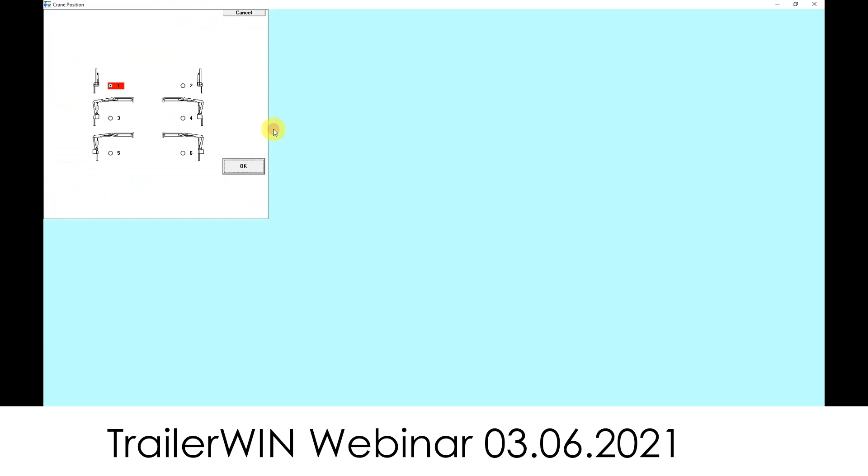For cranes, you don't need to put any data. Everything is in the program. And these come directly from the crane manufacturer. You don't need to change anything. You just select where you want to have the crane, so you select the position. But all the data for the crane is already in the program, in the database that you will get with the program. We have the crane weight, we have the mounting parts weight, we have support legs weight.

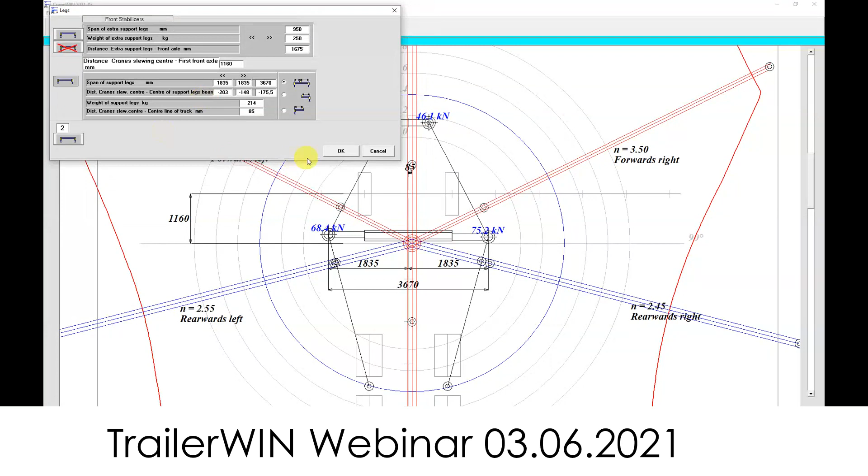When we jump to CraneWIN, we can see more information. We have here the lifting capacity. This is also directly in the database program. We have the maximum outreach, weight of the crane and center of gravity of the crane at max outreach, and so on. So the software includes all this data. You don't need to find this anywhere, because normally this data is something that you don't find in brochures or the normal technical documentation that you will get from the manufacturers.

CraneWIN, together with TrailerWIN, is the most used software among crane mounting companies, and many manufacturers have our software package as the standard for all the dealers. So they require that they use TrailerWIN, FrameWIN in their daily work to do the calculations. Okay.

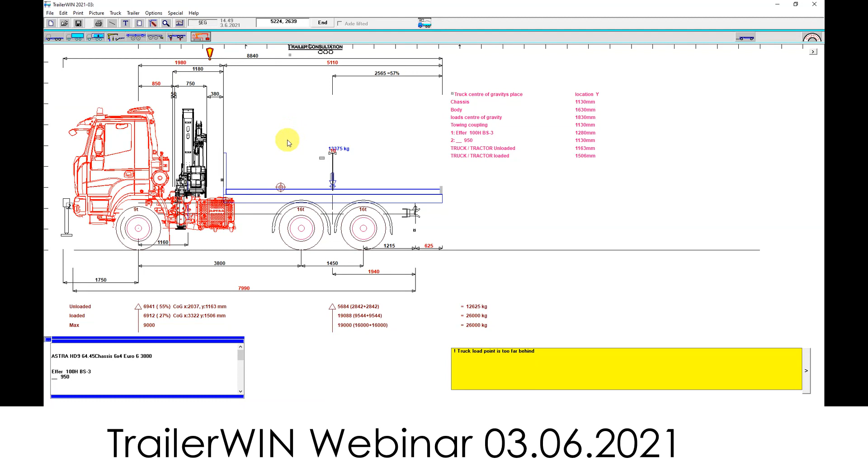Yep. Do we have any other questions regarding this? I can show you some special features quickly. For example, we can now... Any of the team members having any question regarding this trailer and this truck mounted crane can ask directly. So if any question is there, please ask. Yep. Sir, Mitesh is there. Please ask, sir. Yes.

So the crane is having some extra seat and all. They are having some picking, what you call that, bucket and everything. So can we include those also in this crane and calculate how much will be the body length and everything? Is it considering that also, can we add a rider, a controller seat also, or some crane accessories? You mean a simulation with the payload? Not with payload, the body length or how much width it will take, how much that will be changed. We have data of this also in our software, all accessories of the crane and everything.

Are you referring to attachments? Yes, he's saying about the cage which is connected to the crane. Yeah, attachments. Aerial level platform kind of thing. A person can stand or sit there and do work. That's what Mitesh is saying. Cage.

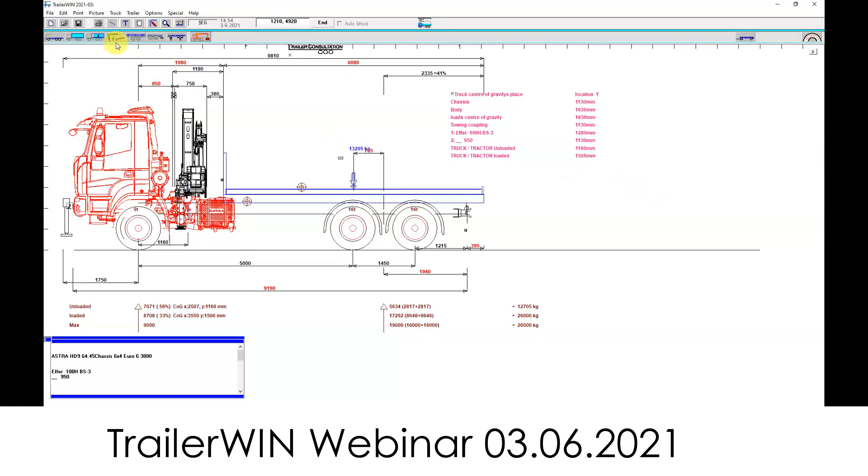Roland, I have one question about TrailerWIN. Is it limited to only knuckle boom cranes, or can it be used for heavy duty trucks like skylifts or aerial work platforms, like the ones Bronto builds in Finland, 60 meters, 50 meters? Can we apply the same software? Yeah, there is a possibility to use the TrailerWIN software also for skylifts and those types.

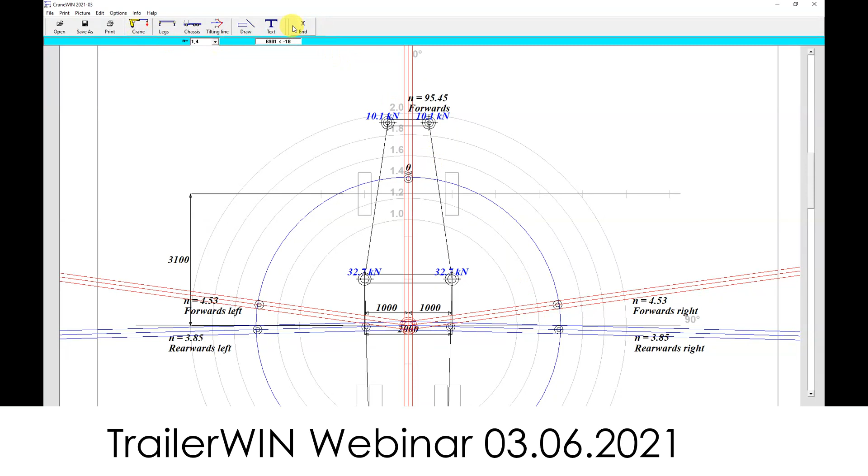But one thing you need to know: when we talk about stability for skylifts, we also need to calculate wind forces, and that is something we don't have in the program. But we have, for example, oil and steel in the program. I will remove the crane here and jump into TrailerWIN. Then we can calculate stability for this type of installation too. But these are very special, and you need to calculate the wind force in the highest position. That needs to be added to the moment of the crane or the lifting capacity.

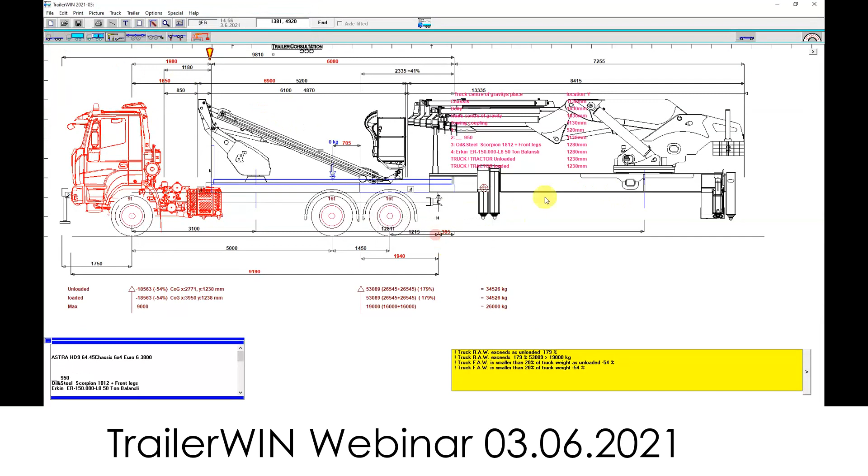But it doesn't have to be knuckle boom cranes. We have all types of different cranes in this list, also very big ones like Erkin, Hydrocon, and those very big cranes, up to 150 ton, for example. I will remove the oil and steel so we don't have them double, and then move it forward.

The slide's not changing, so that's right. It will come. Great. Yeah, now it will take.

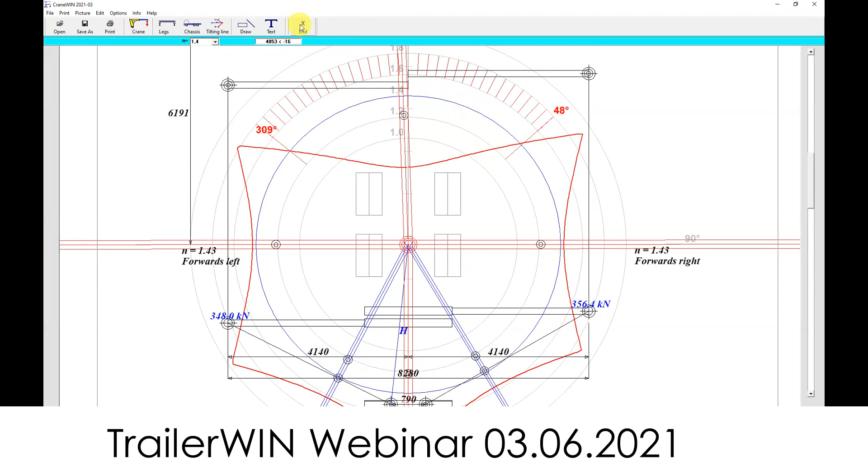Okay, so now we have a very big Erkin crane on this chassis, and we can do stability calculations on this too. This crane has three stabilizer legs: at the front, behind the rear wheels, and an extra one behind the chassis. So a very big crane. So it can help us decide whether the chassis we are using is made for the application we plan to buy it for, or whether we should go for another chassis based on the application, right?

Yes, because this combination gives you all the information you need. For example, here you can see this will be way too heavy for this chassis, even if the crane is quite stable as it is, and the chassis is more like a load only. All the stability is already built into the crane. But you can't drive with this because it will be 27 ton on the rear axle, and the total weight will be 33 ton. So it doesn't only show the stability chart, it also shows whether the chassis is big enough to carry it and whether it will be legal on the road.

Yeah. Did we have more questions about TrailerWIN? Yes, here we have one. Kanchi sir, can you ask directly? There is one question arising from Kanchi sir. Sir, please. Yes, sir. Mr. Roland and Mr. Prabhakar sir.

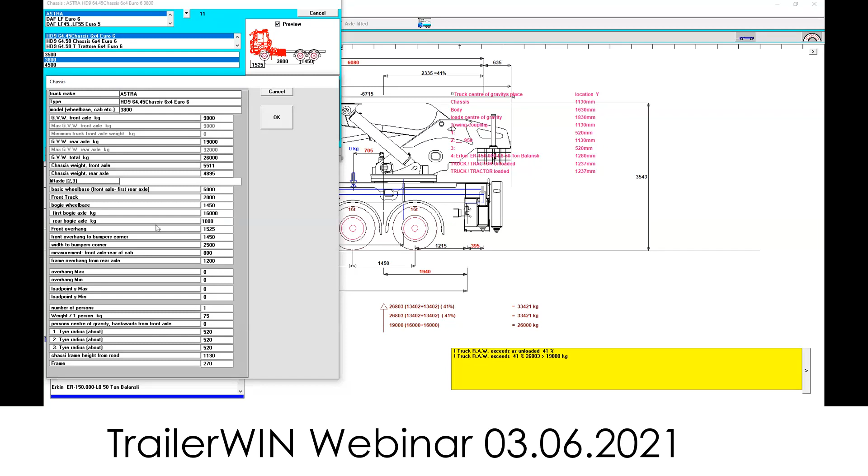But if you are looking, for example, at what will happen if we have a heavier first axle and a lighter rear axle, that is something we can define in the program. We have here the max allowed weight for the first bogie axle and for the rear, and we can change this. Then the program will calculate the center of gravity of the bogie, and the load will be calculated in a different load point, the center of gravity for the bogie.

My point was, for example, if I have 8 axles in a full trailer and I want to check the simulation in CornerWIN, with the different angles of each axle, with the steerable axles. Sorry. Yes, I now understand what you mean. So I select here a standard combination. We have some combinations with all-steer axles. For example, we can take a 2-axle truck and a 3-axle semi-trailer with all axles steered.

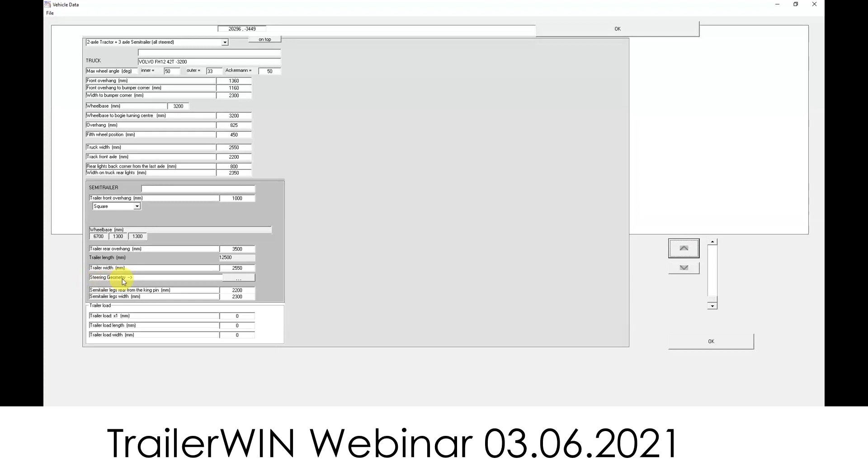When we look in the data for this vehicle, we have the possibility to adjust the steering geometry. We can give the maximum angle when we have the truck in a 90-degree position to the trailer. We can give a distance to the steering point as a fixed value, or we can type in a table relation between the angle on the fifth wheel and the angle on the trailer axle. And this way we can define curves that will fill the criteria for our trailer.

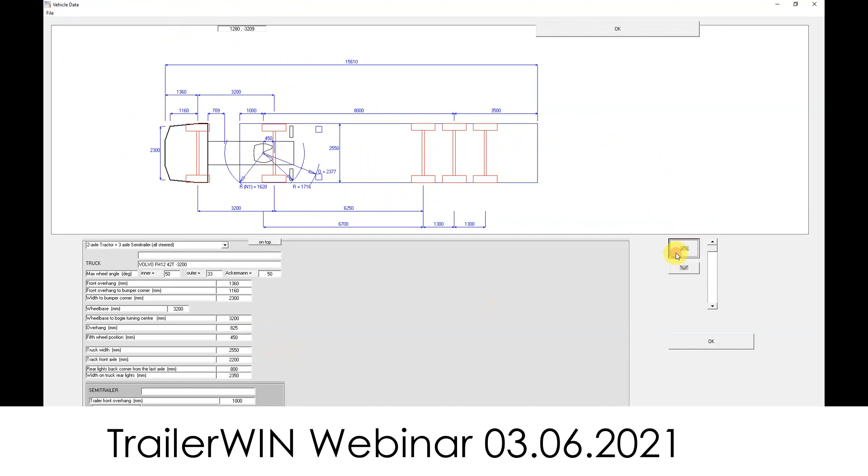Then when we do simulations, the program is calculating with this turning geometry for the steering. So this possibility is in TrailerWIN, in these three different versions. Okay. Yeah. Great. Thank you. Okay. Do you have more questions?

Roland, I have one question not related to CraneWIN or TruckWIN. Normally tippers and tankers carry special application fluids, cryogenic fuels or alkaline fuel. So the superstructure is completely different. Tankers are dynamically very imbalanced, fluids move here and there. So in TrailerWIN, do you have any software for designing tankers which carry fluids?

Tankers with fluid are a little bit special. I will remove the crane here and select another body type. I will select here a tank. What TrailerWIN normally does is calculate the load as one single load point, and it will come in the half of the body length. We can of course move the load point as we want, but many times these are divided into different smaller containers. Chambers you mean in between? Yeah. To avoid the fluid surging here and there.

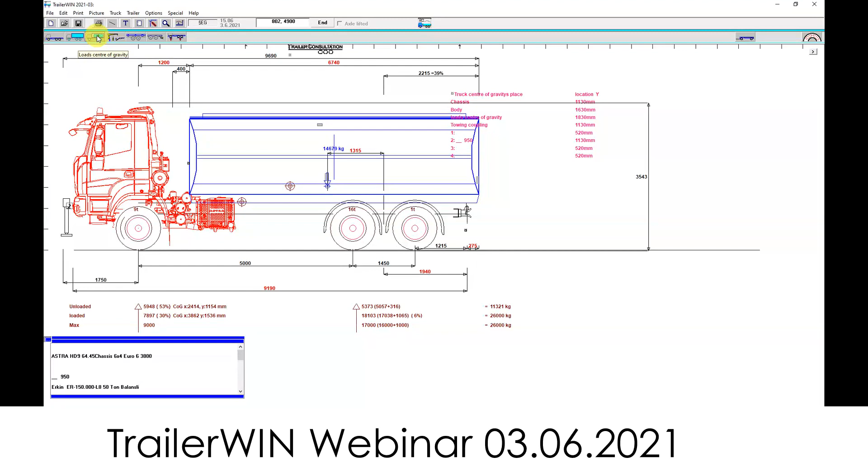What we can do is, when we go in the load window, we can select to have many different loads, and by using boxes, divide the container into many small loads instead. We can define the size of each container or each part of the body, the load parts, and give a weight for each one of these. This has 3,500 as the beginning, and then we adjust it with the mouse, drag it higher, and then we put one more.

For example, here I have now like 3 parts of the container, and the program is calculating then with 3 separate part loads instead of one single load, and we can see the weight there. We can also here now calculate what happens if we only have 100 kilo on the first part, so it's almost empty.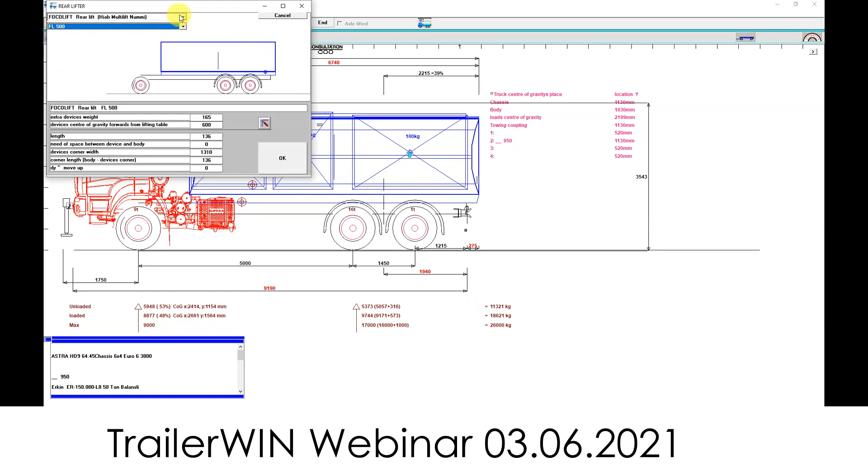So basically, like cranes, all the tail lift options are available in the software. There is a tail lift from HIAB, tail lift from Palfinger, tail lifts from all other European manufacturers available, and they are there as an inbuilt library. So we need to only select. You can see on the screen Mr. Roland is showing. Yes, here you can see the different manufacturers' tail lifts.

And these databases that I have been showing you today, everything will come the same in your program when you buy it. So you will have the full database.

Sir, if we want to see the working of the tail lift, as you have shown earlier, can we see it in the form of a simulation also? Or suppose we have put some load on it and we want to do a simulation. Can this software help us do that simulation, sir?

On tail lift, sir? With TrailerWIN, you will automatically get this LifterWIN program. What it does is that you can select the mounting place for the tail lift, so you can see how it should be mounted on the body to have free movement. You can also see what you need to cut out on the rear end to have space for the arms coming to the lifting plate. So this is what you can do.

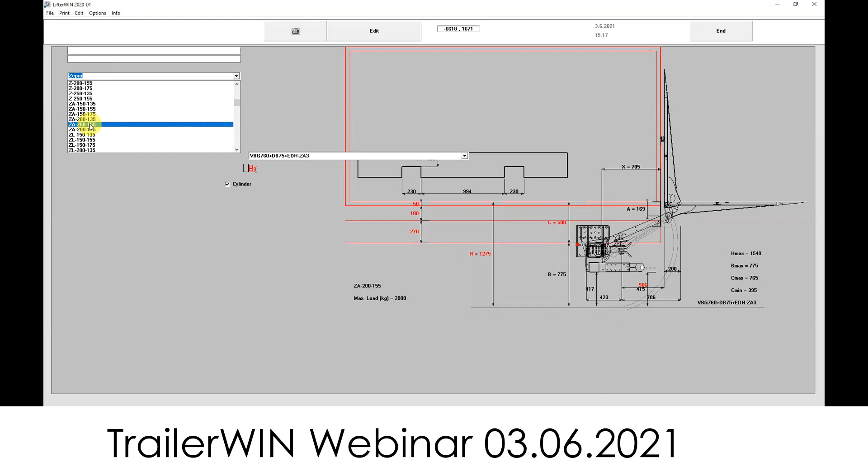In Hollandia, Mr. Roland, there are two types of lift. One is the scissor type, which we have shown earlier, and the other one mounts directly on the side walls of the body, and it only goes vertically up and down. I think Hollandia has that column lift. Yeah, I have a feeling that this is also in the program. Yeah, it is there. We look in the Hollandia.

Do you remember what the name was for this model? No, I don't remember the model name, but I think it is there. It should be in this group. You need to go by this one. Yeah, this one, correct. So we have this also here.

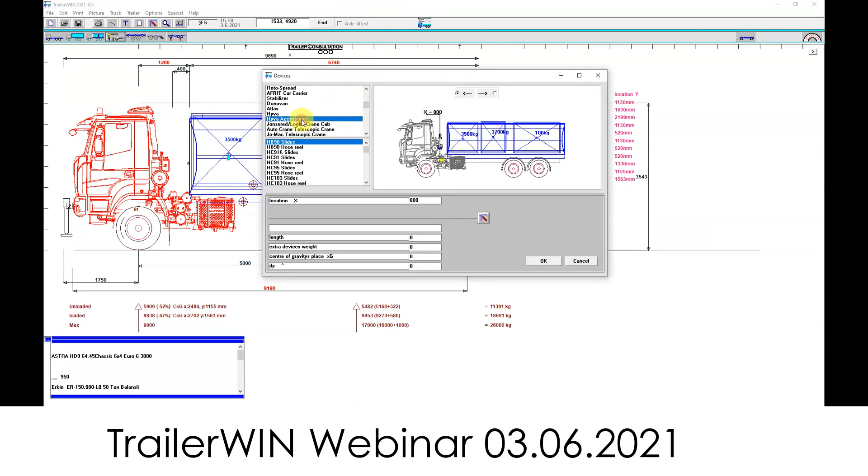And when we are looking in this devices menu, we have many different types; we have grabs here for timber cranes. We have all kinds of accessories for cranes, for example, Hiab accessories. We have spare tire, ramps, spoilers. This can be added to whatever cabin we want. So we have a lot of different equipment here, and all of it can be added to the calculation, and it will also affect the weight of the chassis.

Yes. Sir, one more question. As the lift appears in red color, if we want to get some structure requirement, like what kind of structure it has, what kind of pipe is there, what is the minimum YST of that pipe, can we get that information from the software, or do we have to choose it on our own, sir?

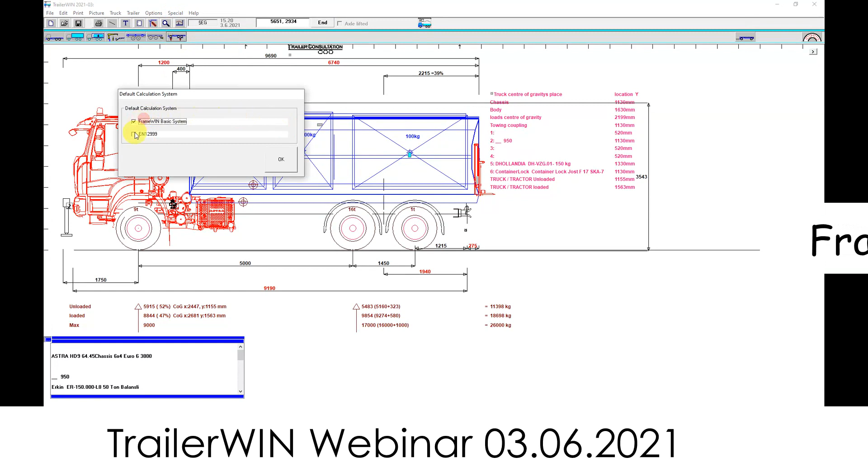In this software, what we have is FrameWIN, which is for the subframe calculation of any superstructure, either for a hook loader or for a crane. Normally these two applications are where we have a combined strength of chassis and frame together. So FrameWIN is available here and all analytical calculation can be done. You can see it on the screen.

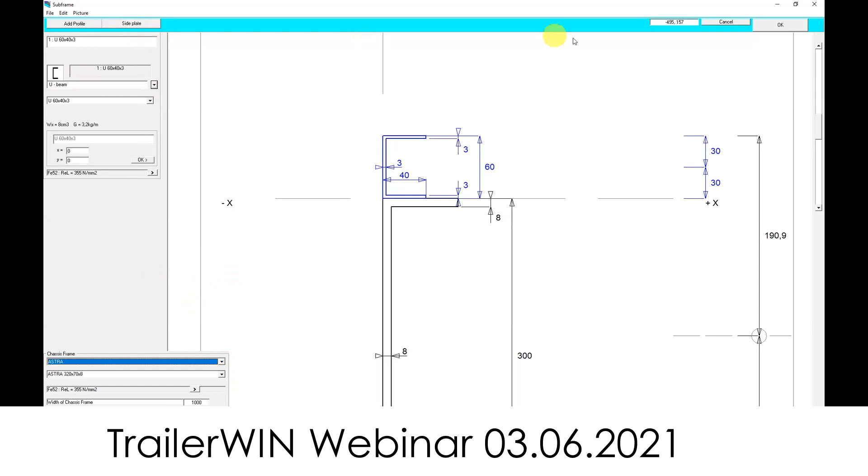Yeah, and this is for calculating subframes for both cranes and tailgate lifters. So we have a chassis frame. We can select different types of frames from different manufacturers, and we can build a subframe with different types of beams, different sizes. We can also have different materials for the subframe, and we can add more beams to this.

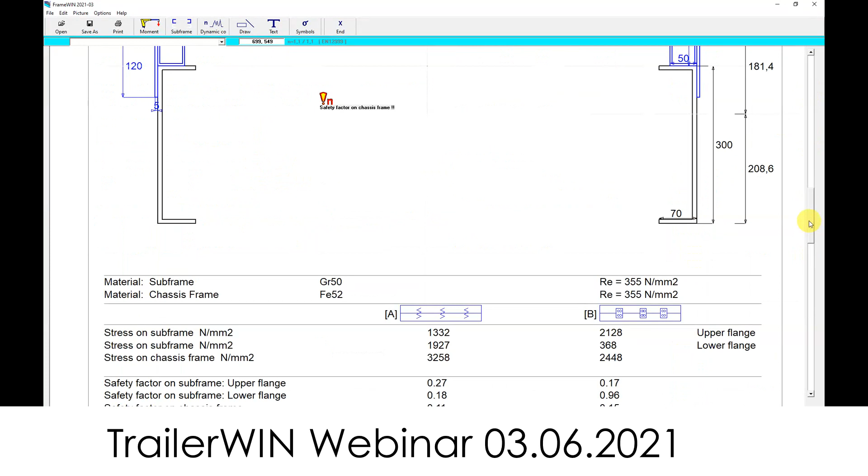And then if we have a crane on the chassis, for example, here we get the data from the last crane that we had selected, the Erkin crane. It's a very huge one. And we can see here the safety factor on the subframe and on the chassis frame.

This is not a very good example because the Erkin crane has its own subframe, so we are basically trying to build a subframe for the Erkin crane. But this program can also be used for tailgate lifters, when we want to calculate the subframe for the tailgate lifter. Here we can enter any kind of load that we want to calculate with.

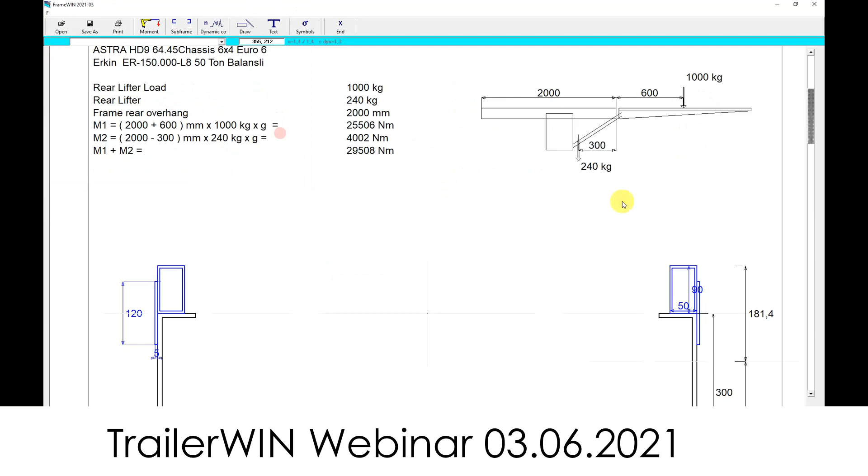Then we can get the safety factor for the subframe and chassis frame. In this case, we have a very huge subframe for a small tailgate lifter, so that's why it's giving big values.

Sir, by using this FrameWIN, can we define whether the structure we are using to make the subframe is overloaded, heavyweight, or underweight? Can it help us get that value in a few clicks, sir?

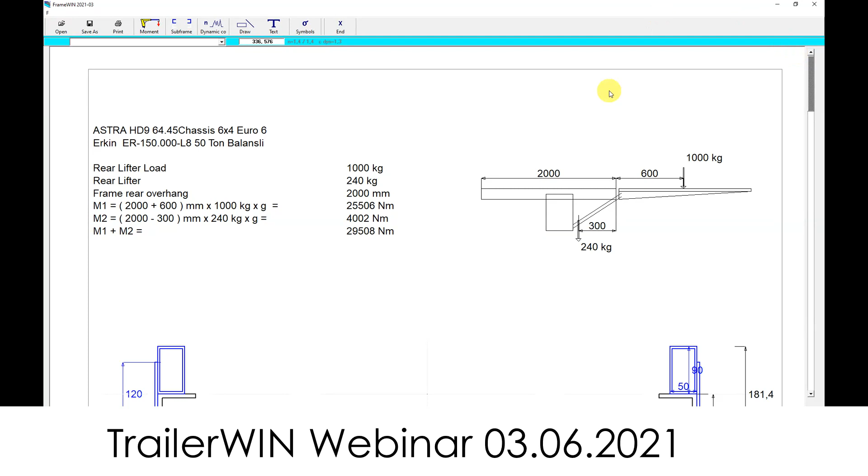Yes, there is a factor of safety calculated here based on the subframe we select, and we can see what factor of safety we need, 1.2, 1.3, or in case of heavy duty cycles it can be increased to 2 also. Accordingly we can select the structure, so it will give you the calculation for heavy load and what safety factor you want to follow. If the client has given that we need this much safety factor, that can be calculated well here.

Absolutely. And from where does this safety factor come, either from the OEM or from the manufacturer? No, factor of safety is basically the ratio of the stress value which comes from the load and the material's own strength. That is the basic calculation. So in a few cases, if there is a requirement for a crane, a special application, a special factor of safety from the client, that can be addressed well here. Accordingly, you can redefine the section, you can define the material, everything can be included here.

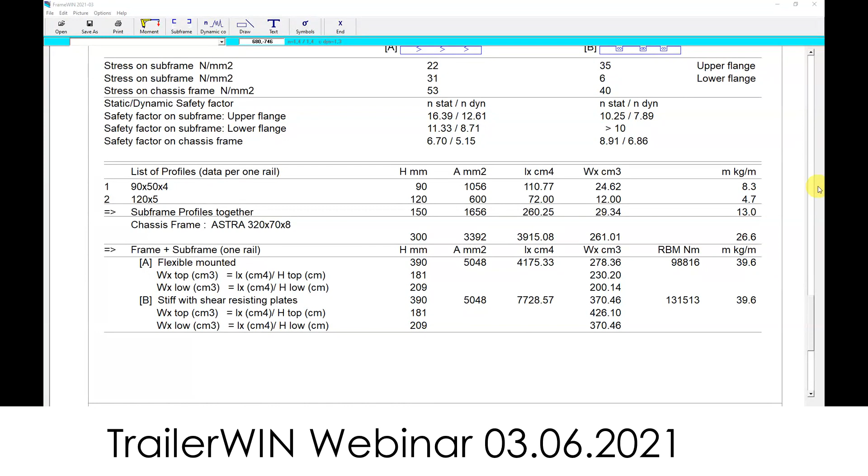Okay, yep. Am I right, Mr. Roland? Yes, exactly. And when we are looking at the safety factor, it also depends on what type of crane we have, and you have the possibility to define this menu. We can see here the crane lift velocity, we can adjust the dynamic coefficients, and the safety factor for the subframe and the chassis frame.

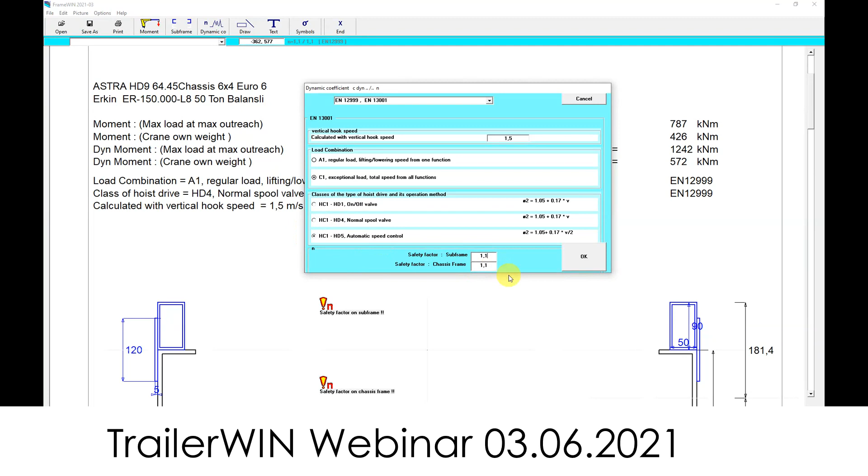And when we are working with cranes, we can also use the EN 12999 standard, where we can select what type of load combination, if it's load from one function or exceptional load for all functions, when you are lifting and lowering from all functions at the same time, and what type of spool valve, an on-off normal spool valve or the latest automatic speed control. And when we are defining with this new standard, we can use a safety factor of 1.1. So it will give us very reliable values. Yeah, correct.

Okay. I think we have been about 2.5 hours now looking at this, so everyone is feeling maybe a little bit tired. Sir, how fast time runs. I think it's only 15 to 20 minutes we are talking, but it's really very interesting to see such things available in the market, and it's really one of the very nice ones, sir. The wind one is also something new which can be added. It's a demand for the future, sir. Yeah, sir. Kanchi sir, any questions, sir?

Yes, sir. Nice presentation. It requires a lot of learning. It can be applied anywhere in our process, all products. That will be very great for us to learn. Thanks to Mr. Roland and Prabhakar for this great initiation. Thank you very much, all people. It is very good time you have spared for us, and this is probably one of the best software I have found, at least in automotive applications. So really I'm a fan of it.